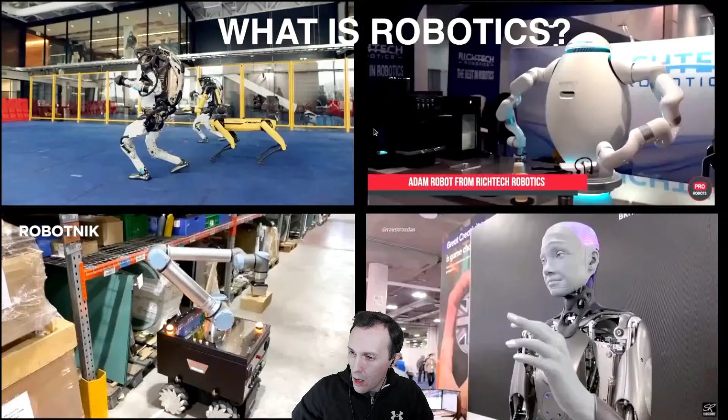Okay, so what is robotics? Well, in short, that's a study of robots, which covers different phases like design, construction, operation, and other stuff, pretty similar to what we get used to in common software development, but this also covers the hardware part as well.

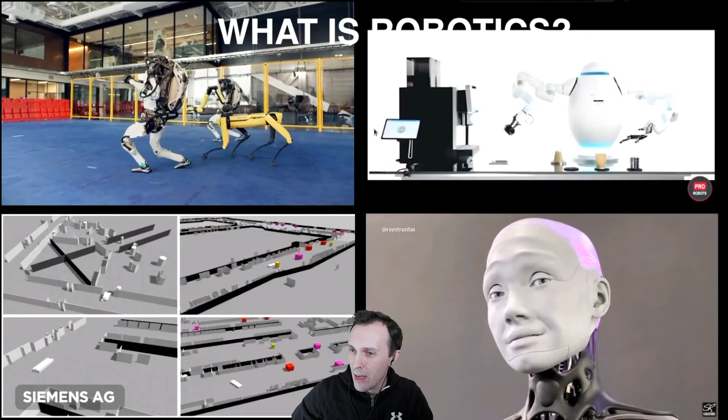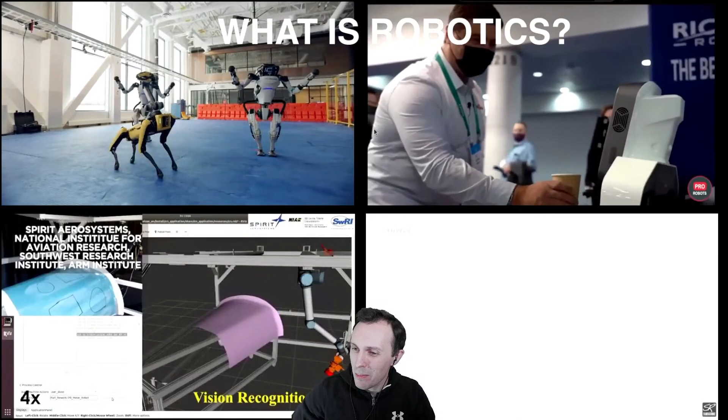On this video, you can see the current state of robotics. Of course, that's not everything that's happening in the robotics world at the moment, but you can easily find more videos on YouTube, and I promise you'll be excited from what you'll see.

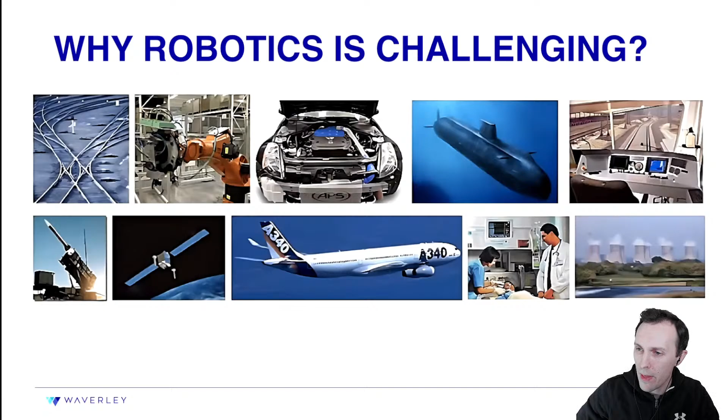So the robotics field is quite challenging, and there is a number of reasons for that. First of all, it could easily be put on the same line with such domains as healthcare, aerospace, automotive, etc. But by definition, a robot assumes significant interaction with the physical world, which also means interaction with humans. Technically, robots can be used in each of these areas.

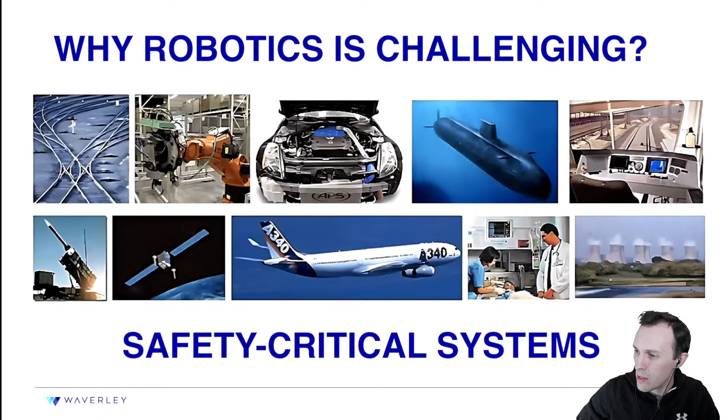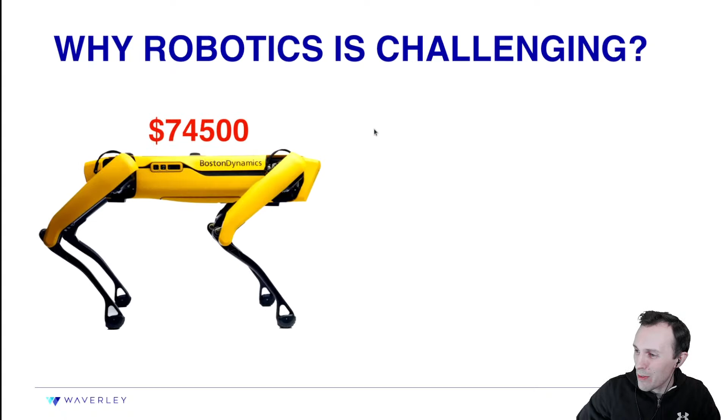So the other reason I would like to highlight here is the price of the robot. That's a commercial grade robot from Boston Dynamics, you probably heard about it before, called Spot. Here is the price of the base version of this robot. Just to give you a comparison, here is the Porsche Cayenne price.

As I mentioned, that's a base version, and if you want to make it more suitable for your business needs, you would need to add additional sensors like lidars, cameras, manipulators, and well, you may quickly end up with the price of a Ferrari in this case.

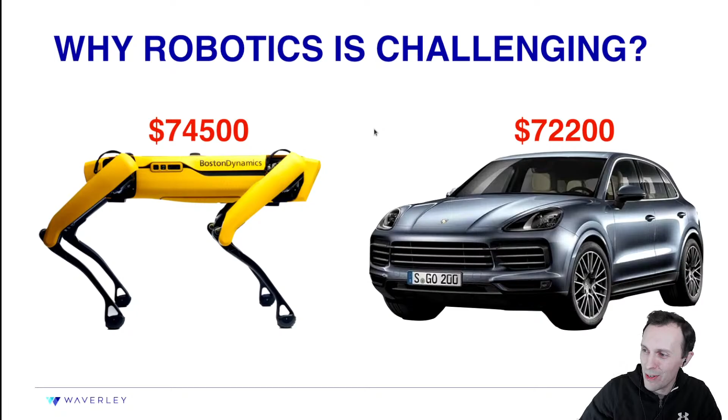So you may just wonder, what do we get for this price? I would probably expect a perfect machine that can do everything we want, but in fact, it's imperfect. And we, as an engineering team, are responsible to make it safe for the surrounding environment and humans. All right, and that's why testing is crucial.

And if you talk to any robotics consultant and ask if it makes sense to start testing on the real hardware, they would say no way. Because obviously the cost of the defect is huge, engineers in robotics start with simulation. They build a simulated environment which is close to the real environment that the robot would operate in, and only after that they can move to real hardware tests.

I will cover this part a little bit later today, and now I'm going to switch to some common terminology, just to be on the same page, and it will help you to understand me better within this session. But you would also hear a lot of these terms in different robotic communities.

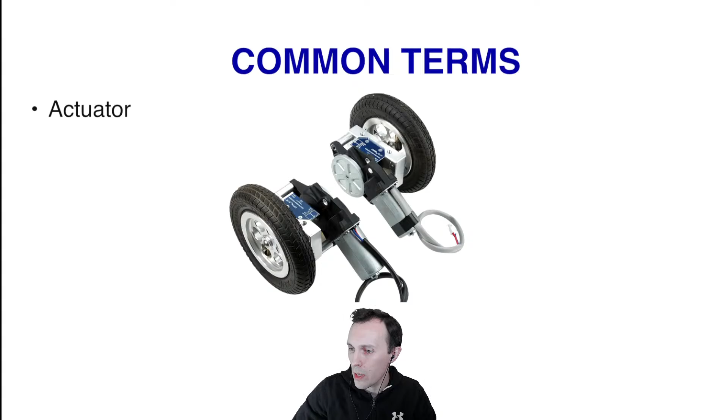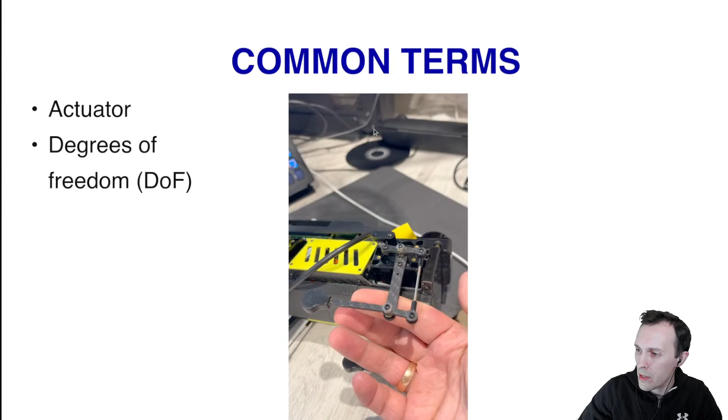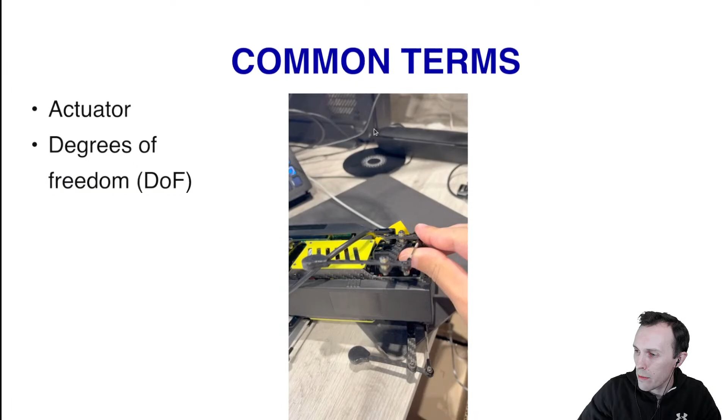Degrees of freedom, that's the level of flexibility and versatility of the robot. In this particular example, we can see a legged robot, so we can move its leg in different directions, and it is controlled by 3 servo motors.

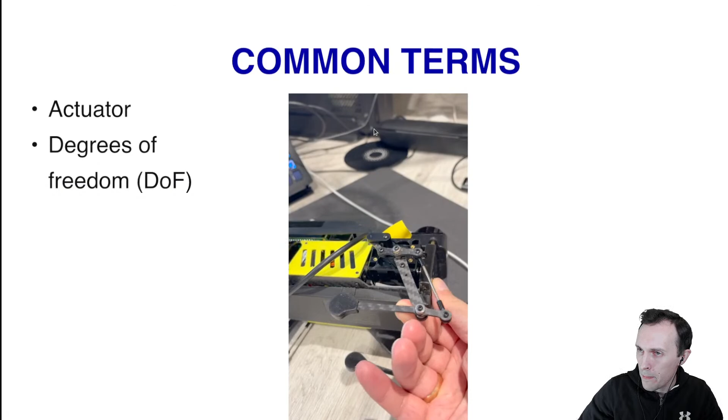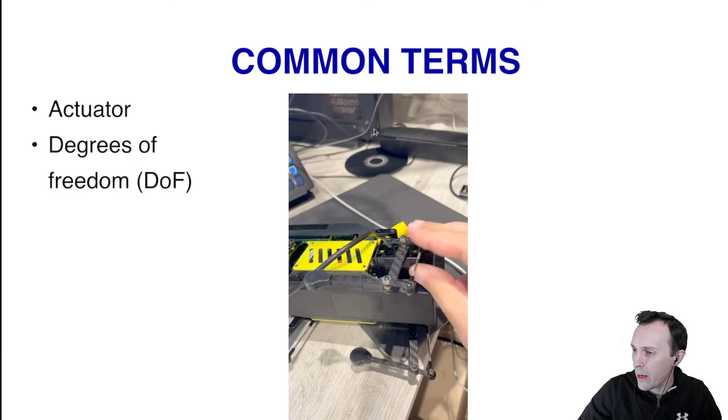So usually in the robotics community, it's common to treat the joints or actuators as a single degree of freedom. So given each leg has 3 degrees of freedom, the whole robot in total has 12 degrees of freedom.

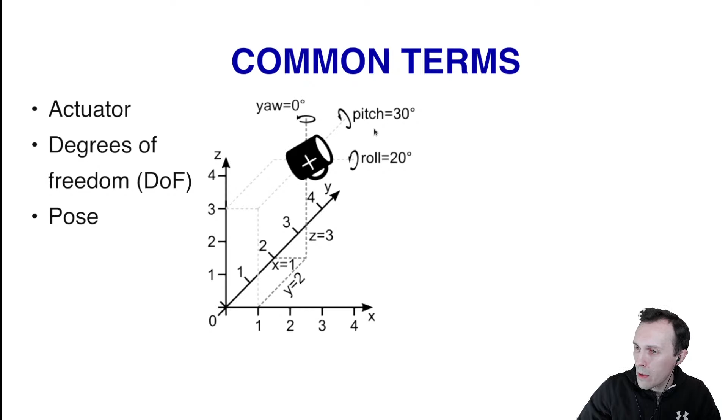The pose of the robot is the combination of position and orientation. That's a basic example of a cup in 3D space, just to give you a reference. We may have some point that represents its position, and probably the terms like yaw, pitch, and roll would be new to you, but basically they reflect the rotation angle along the corresponding axis. The easiest way to remember and make a visual association with these terms is to follow the right-hand rule.

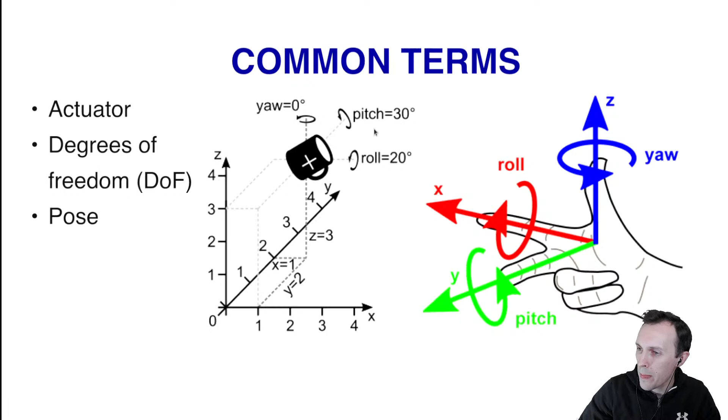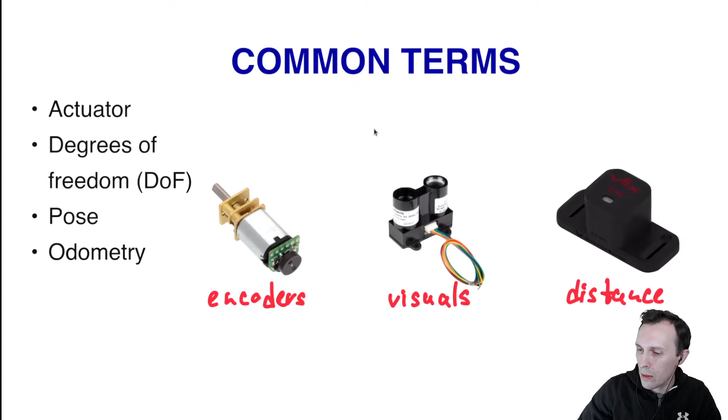Odometry, that's a very important process. It's a method of robot pose estimation. I will cover this part later within this session, but for now I would like to highlight that there are a number of ways you can get this data, like wheel encoders, visual distance sensors, and other stuff.

Velocity, that's something you should be aware of from your school or university classes. I would just highlight the difference here. The same way we decompose the pose into position and orientation, the linear velocity reflects the position change rate, and the angular velocity is about orientation.

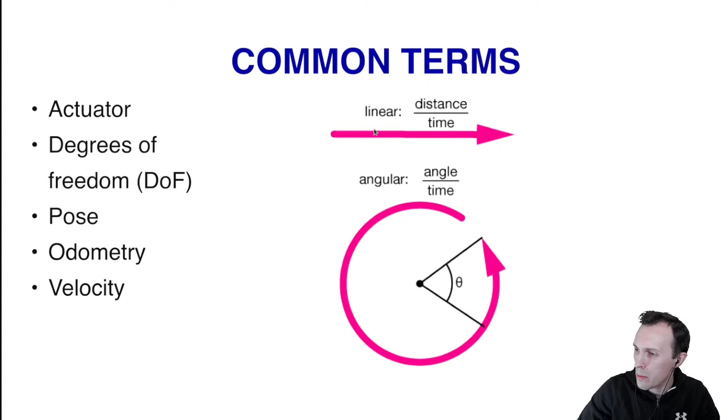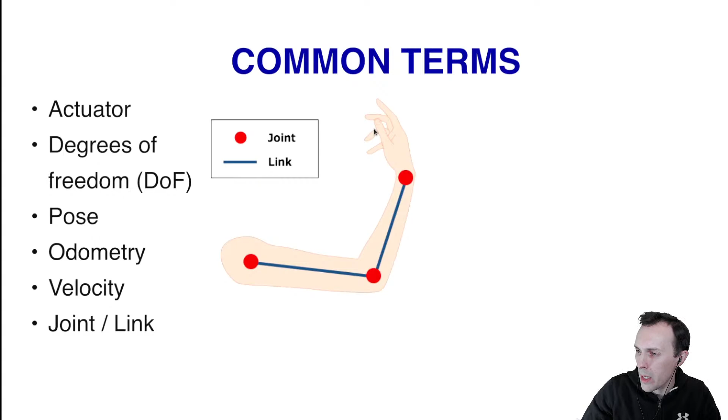Joints and links, that's something you would hear a lot while modeling, on the modeling phase. To give a visual association, we can refer to the human arm here. Basically each part of the arm might be treated as a link, and the connections between these links are treated as joints - that might be wrist, elbow, shoulder, for example. And to compare it with an industrial manipulator in this case, you can also see that there are a lot of links and joints as well.

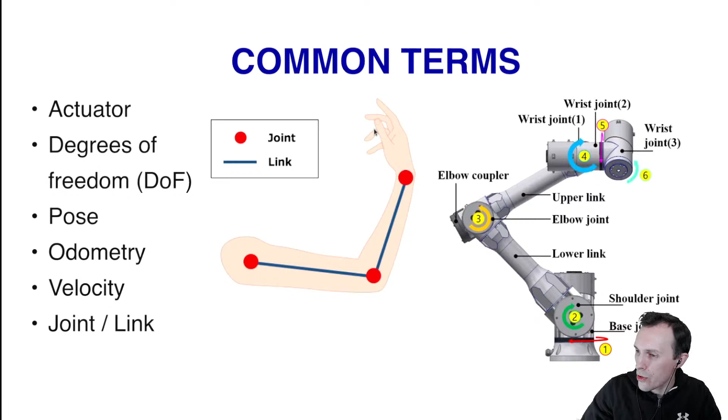Kinematics, that's one of the most important and probably trickiest subfields in robotics. Technically it's an engineering branch of mechanics, which in turn is a subfield of physics, but in short, it's a study of motion.

Let's consider the following example. You want to move your robot, or ask it to move, to the opposite side of the room. In this case, we can decompose this task into the robot's position change over time. So you need to move the robot from point A to point B. We operate the robot's position in 3D space, or task space. But the robot itself knows nothing about the pose or 3D coordinates, so it doesn't care about it.

So we need to tell the robot how it should move to the opposite side of the room. The only thing the robot understands in this case is how to, for instance, rotate the joints or servo motors - at what rate, what angle should be set for each joint. So that's about the joint space.

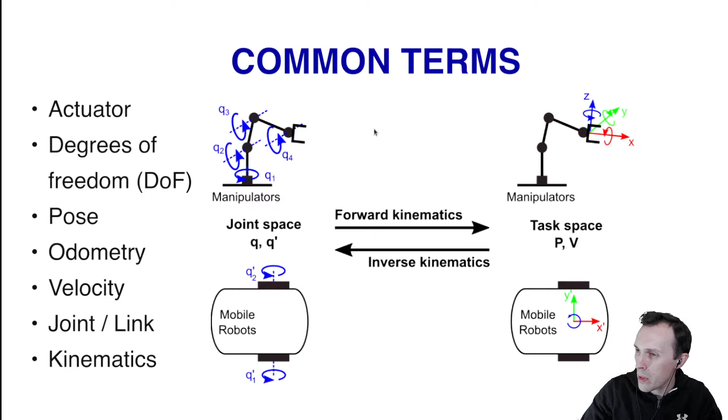Okay, so before we move on to more technical stuff, I would like to touch on another important topic, which is a brief overview of autonomous systems. The first thing I want to cover here is the variety of autonomy levels. I don't want to cover them all - I'll just focus on the boundaries to give you a reference.

The zero degree of autonomy is also known as the teleoperation process. That assumes we control our robot with a human in the loop, and we can technically use any known interface for that - for example, keyboard, mouse, gamepad, or even haptics. That's an example, probably the most advanced example, of how we can control robotic arms with special gloves which mimic human movements. That's pretty useful in case we want to operate in a potentially dangerous environment for humans.

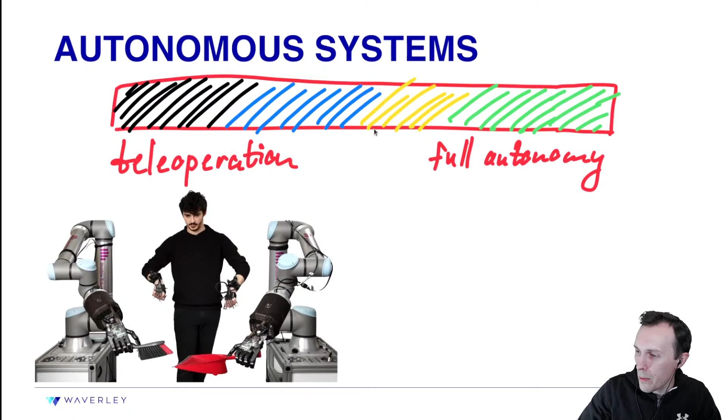To give you an example of full autonomy, the most popular one you may find would be a warehouse robot. But you may also have heard about autonomous vehicles, like self-driving cars that appeared on the market several years ago. That's also a good example of a fully autonomous system.

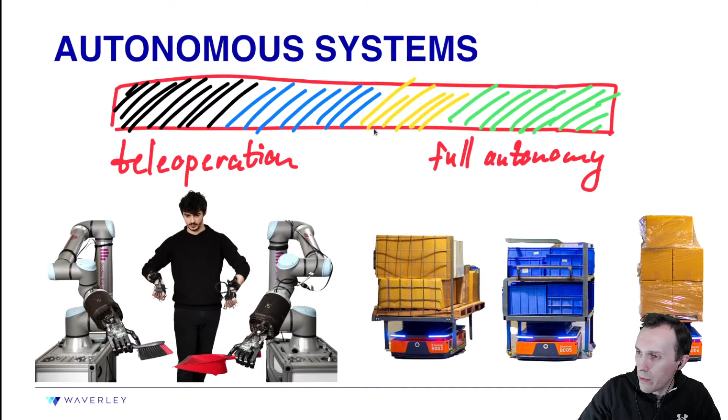In terms of capabilities, I already mentioned that robots assume significant interaction with the physical world. That's how they collect knowledge from the surrounding environment, the way we humans do using our senses, like eyes, arms, ears, and other parts.

That's the sensing phase, and the robot uses different sensors like lidars, cameras, and inertial measurement units to collect this information. And we do that for some reason, of course, and that's how we come to the perception phase.

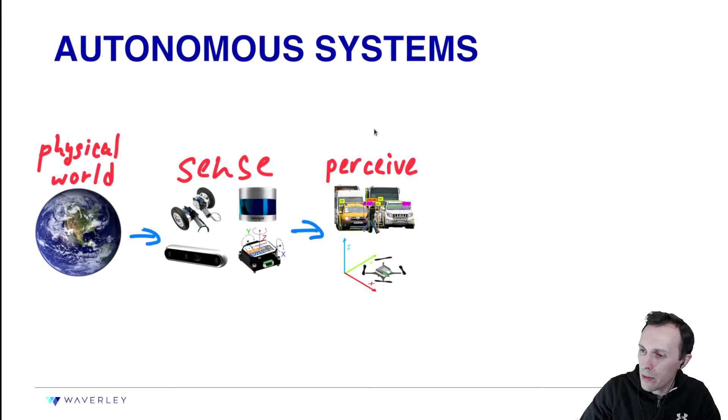That's where we know how to interpret this information. Given, for example, some visual sensors like a camera, we can do object tracking, or be able to localize the robot in the environment. We need to be able to estimate the pose of the robot. So that's just a couple of examples. Of course, it depends on the hardware that is mounted on the robot.

When we know how to interpret this information, we can do planning, and that's where the business goals come into play. The basic example might be patrolling, when you need your robot to move through different waypoints around the territory and take some information.

And the acting phase, that's basically where we ensure that we follow our plan, and that's where we also close the loop with the physical world. As soon as we send some commands to the robot, it changes the state of the environment.

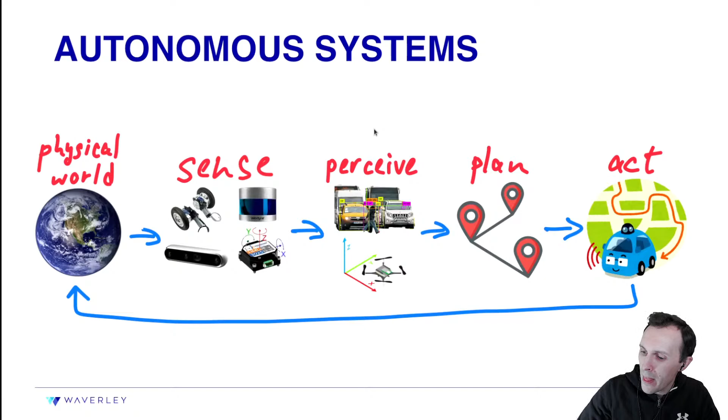Okay, let's move on to more technical stuff. If you ever wondered if there is anything existing which allows control of robots, there is, and that's the de facto standard called ROS, or Robot Operating System. Just to clarify, that's not technically an operating system like the ones we're used to, Linux, Windows, or Mac. It's more like a framework and a set of tools that allows us to effectively control robots.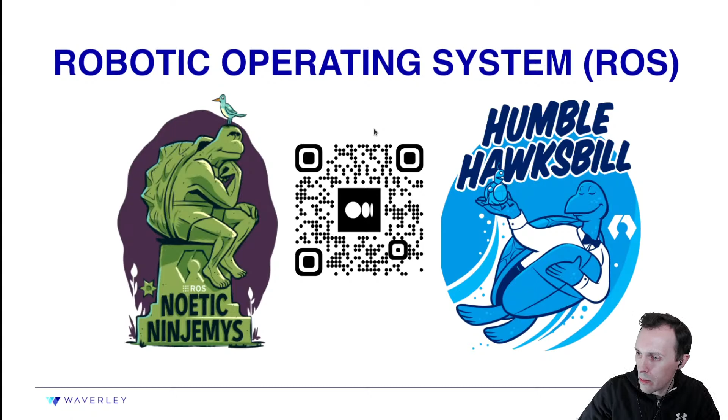Basically, ROS2 addresses all the issues present in the first version, but you can read more about the differences between these two by scanning this QR code.

Okay, so let's take a look at the common concepts. I mentioned ROS2, but technically they are all valid for the first version as well. So what is a Node? Well, a Node is like a common process, just some sort of a wrapper, and you can put everything you want there. An example of a node might be a driver for some sensor, or the planning and control nodes to do autonomous navigation.

So everything else is pretty much about the way these nodes communicate with each other. Technically, ROS is some sort of communication-driven framework. The topic-based communication, if you've ever worked in the IoT field, you may have heard of MQTT protocols. It's quite similar, but there are some differences. MQTT uses a broker to route requests between publishers and subscribers, while ROS uses a bit different style that I'll cover in a couple of minutes.

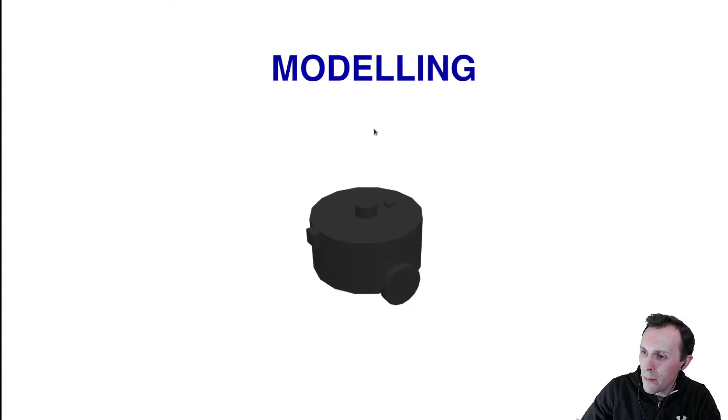Modeling is a very important process. I've already mentioned at the very beginning that there are a number of reasons why we need to test our software in a simulation first. That process covers the modeling of your robot. The process itself is quite straightforward. There are a number of formats you can use. One of the most popular is the URDF format.

It's an XML-based format. There is also Xacro, which is more like a template engine that allows you to create reusable blocks, define variables, macros, and other stuff. That makes your code more readable and maintainable. But at the end, this template engine would still generate your URDF, which is fed to the robot state publisher, a specialized node that interprets this model and sends it to all the potential subscribers. An example of such subscribers could be visualization or simulation tools that need that information.

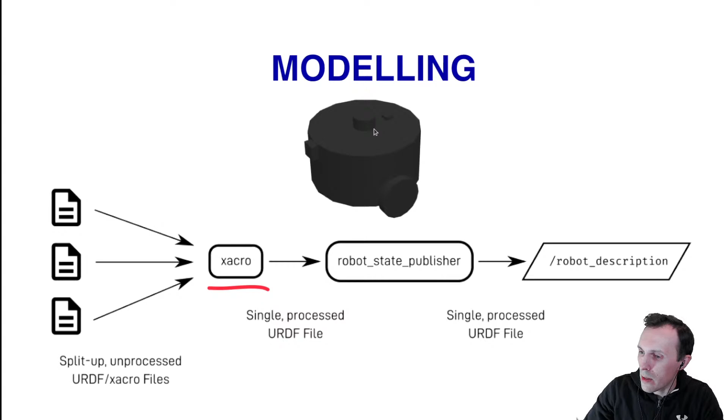So let's take a look at the example of a wheel. Here we have links and joints that I've already covered in the common terms section. A wheel is our link, and the joint, well basically it could be treated as a servo motor, but the only thing I want to highlight here is the type of the joint.

If we consider some rotary joint, that's like a servo motor, that's a continuous type in terms of ROS specific modeling. But you can also have static joints. For example, if you want to connect some sensor like LiDAR or IMU to your robot body, they are not moving, so that would be a fixed type of joint.

The link consists of different parts. The visual part defines the geometry of different parts of your robot. It might be some common shapes like cylinders, boxes, and other stuff. But you can also use a 3D model here if you have experienced 3D modeling engineers in your team.

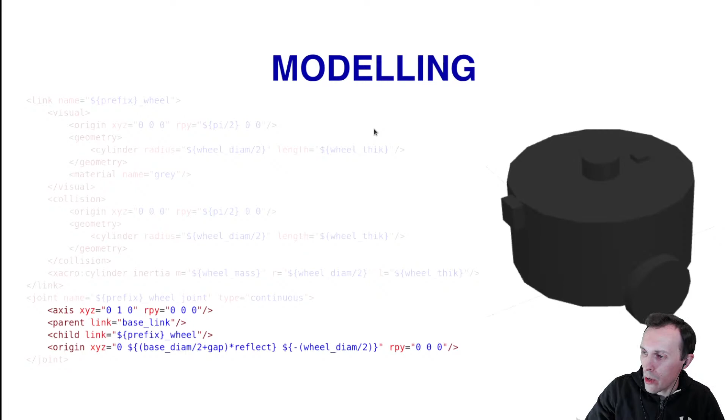So the joints, that's pretty straightforward, as in the joints section we define the relationship between different links. In our case, we have a robot base or body, and we connect it with a wheel. We can also specify a relative position and orientation of this part.

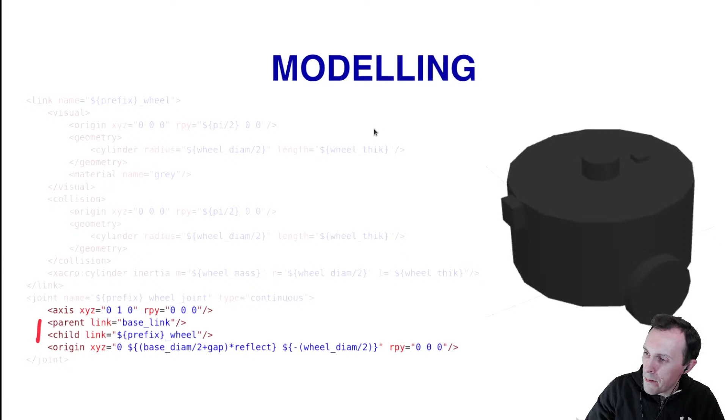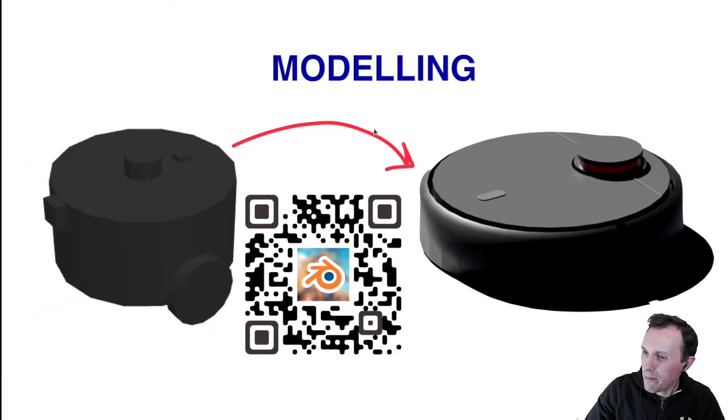So I've also mentioned that you can use a 3D model instead of common simple shapes. That is achievable using specialized 3D modeling tools like Blender. That's not quite the same robot, of course, but just to give you a reference of what you can create in this tool, if you need that.

When you are done with the robot modeling part, you can switch to environment modeling. Ideally that should be pretty close to the real environment that your robot would operate in. That's just an example of the room of one of the apartments that I've rented before. I spent about one and a half weeks, with zero knowledge in 3D modeling, to build that.

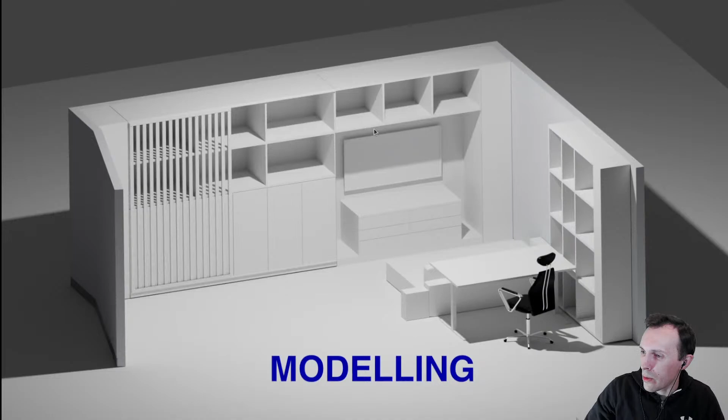So technically, yeah, you can do the same. I would recommend the Polygon Runway courses, Blender courses. They have a free course which would basically be enough to build something similar.

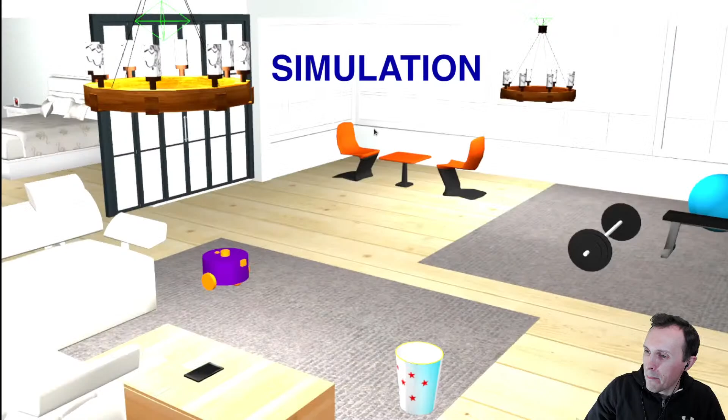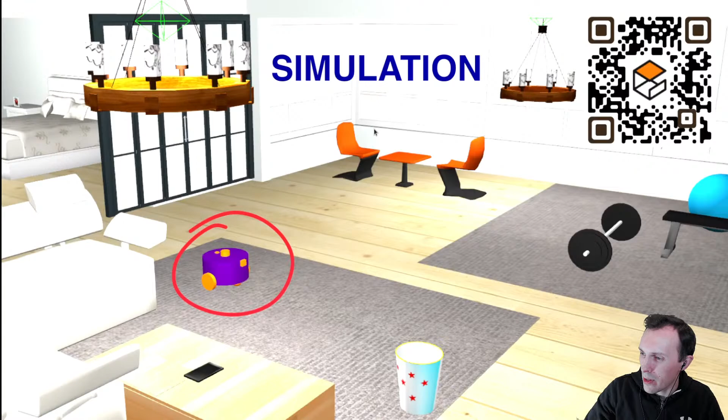When you have both models, you can deploy them into a simulation engine or physics engine. One of the most popular ones is Gazebo. Here we can see our robot that I already described before. The world is a bit different. I've just reused an existing small house world, an open source world provided by Amazon. You can find it on GitHub.

It would be pretty useful if you either don't have a real robot yet, or want to practice some algorithms with your particular robot. Feel free to get more info about the Gazebo engine by scanning this QR code. It is officially supported by the ROS committee and community. Sometimes people use different types of physics engines like Unity, but it's up to you what you choose. If you don't have any experience in robotics, I would recommend sticking with Gazebo.

Okay, so that's an exciting moment because now I want to show you a demo of the internal product that we are currently building at Waverley, Ukraine. At this point, I want to also involve more people from different locations, so feel free to contact me either in Slack, or at the end you will see a feedback form where you can leave your intention to assist with this project.

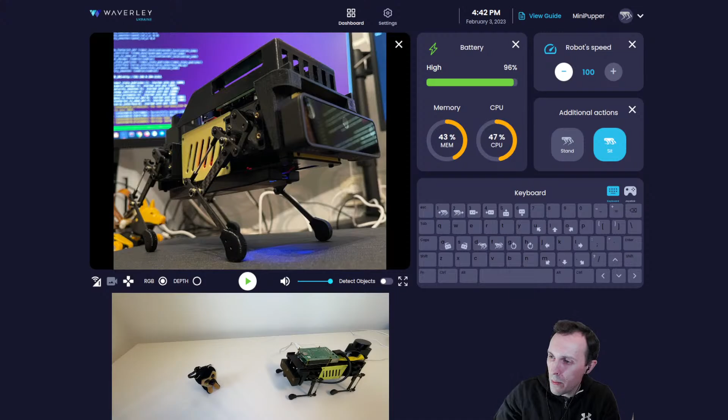Okay, so let me switch to a different window. Here is the real app. The main screen is pretty much like a video player you'd get used to in other streaming apps. At the moment it can stream video from the robot's camera. Below you can see the stream from my phone. Technically it's not a part of our app yet, but I wanted to give you a reference from a different perspective so you can see the robot. And the dog, well, we will use it for our experiments as well.

Yeah, so basically at this point, this app allows us to do teleoperation or remote control of our robot.

We have different widgets here, like hardware sources. Battery is currently simulated, it's not yet implemented on the backend side, but memory and CPU are taken from the Raspberry Pi, used as a brain of our robot.

Robot speed is something very hardware specific. This particular robot's servo motors work at the top speed, so we cannot increase them, and technically physically we cannot reduce them either, but we can use some software tricks to make the motion slower.

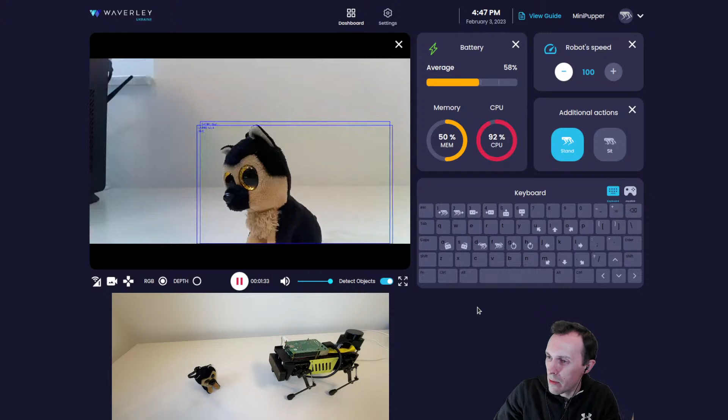Yeah, and let me switch to the depth mode. So we can't see anything yet. I will just turn the robot to my direction. You can see me sitting. Let me just move its head up. I can move my head closer, turn it here like this.

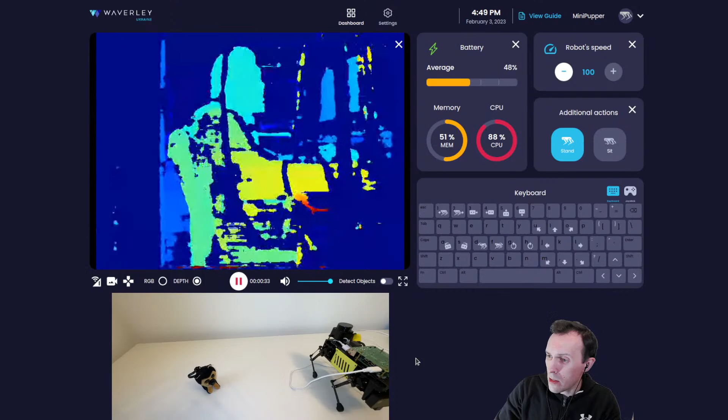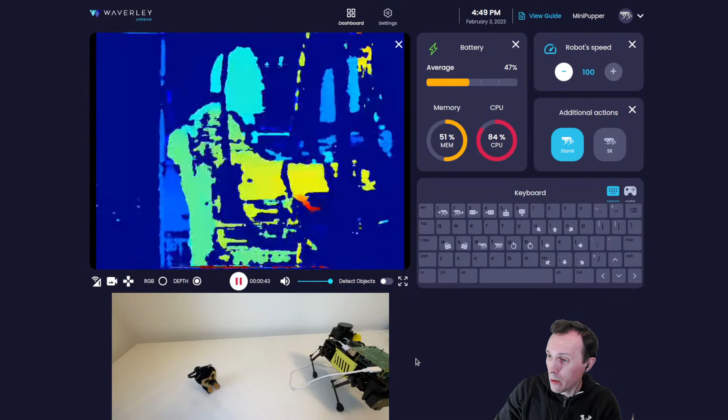So that's a depth mode of the camera, which can also be used in the other tasks that we will cover later today, like obstacles detection. Okay, so that's how the teleoperation work. At the moment, that's pretty much we support in this app.

But we have a roadmap, and well, technically we want to add some more advanced stuff to be able to do autonomous navigation and robots fleet control and the other advanced stuff.

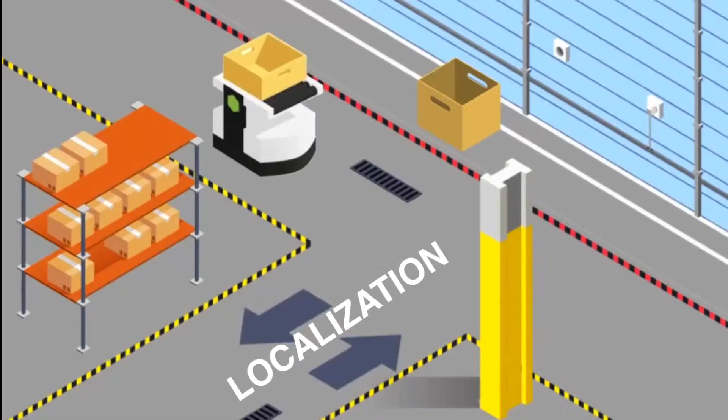Okay, let's move on. So the other important task that is used in robotics is localization. So that's basically an ability of the robot to know where it is in the environment. And this is a tricky one because it covers a lot of underlying algorithms involved.

Basically, one of the most popular ones is the sensor fusion algorithm, which allows us to merge data from different sensors to produce a more accurate pose estimate. Well, you may just wonder, why do we need that? Why do we need to merge data from different sensors? Well, the reason for that is that our sensors usually lie. They are not so accurate as we might expect. They may produce noise, they might drift, they might be affected by occlusions.

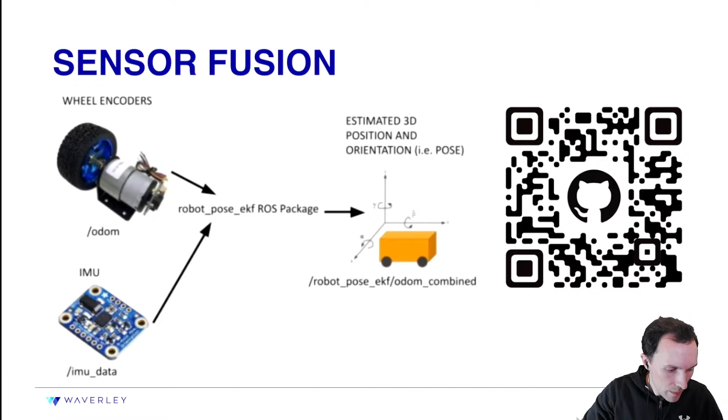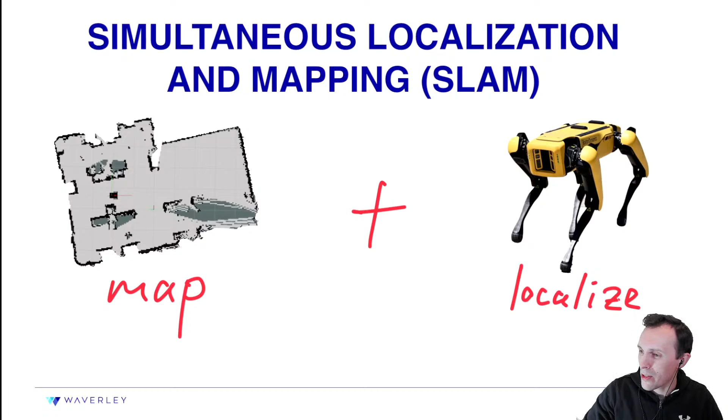Let's move on. The robot localization process is usually not done in isolation, so you usually use it together with mapping. And that's actually one of the trickiest problems in robotics, called SLAM, or simultaneous localization and mapping. From its definition it seems quite simple and straightforward at first glance, as you need to be able to localize a robot and build a map. But in fact, this problem is also associated with a chicken and egg problem, because to build a map you have to know where the robot is, and to be able to localize a robot in the environment, you need a map.

Technically, to construct a map, you are taking different readings from different sensors like lidars, cameras, and so on. But the robot needs to know where it is in the world to be able to put this sensor data on the map, and to know where it is, we need a map to align the current readings from the sensors with the previous data we received. So that's why we reach a circular dependency here, and that's also referred to as the chicken and egg paradox.

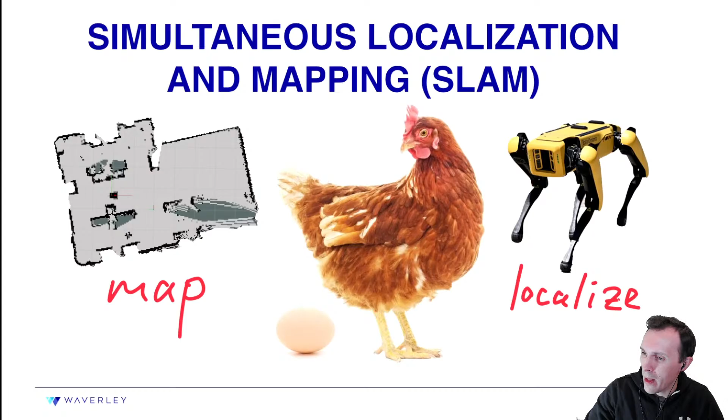Just to give you a simple example of 2D SLAM: if you've ever worked with a robot vacuum cleaner, you may have already seen companion apps like the one displayed to the left. The first time you run your vacuum cleaner robot, it examines your apartment or house and builds a map of your rooms — that's a similar process here.

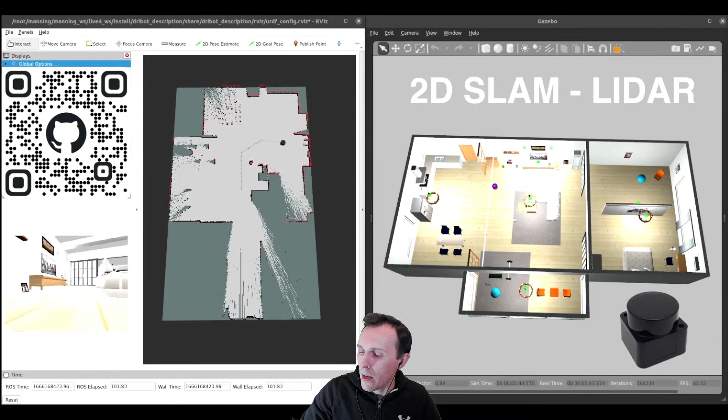To the right you can see a 3D simulation of a small house using Gazebo, where we technically use a lidar to build such a map. You can even buy an inexpensive lidar version which supports 360 degree scans, but more advanced commercial grade robots may use more expensive lidars which support 3D mapping.

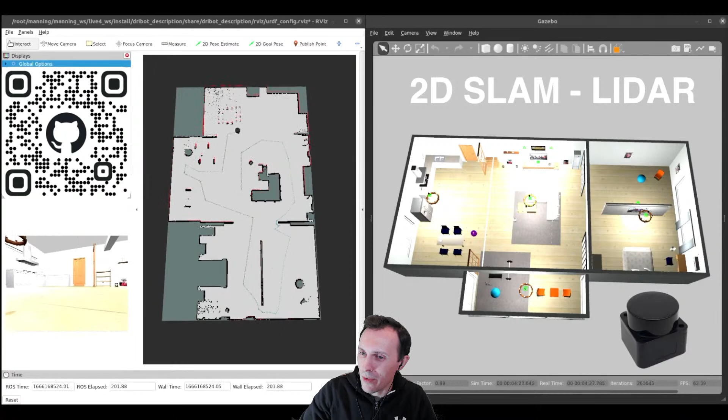Okay, so let's move on to the autonomous navigation process. Technically, it's the ability of a robot to move from one point to another without human intervention. So that's a very complicated process which involves all the data that we already learned from our previous slides.

Just to summarize what information we need here: first of all, it's the ability of a robot to estimate its position, and that's where we get this information from our SLAM algorithms. On the other hand, our robot should be aware of obstacles to be able to navigate autonomously.

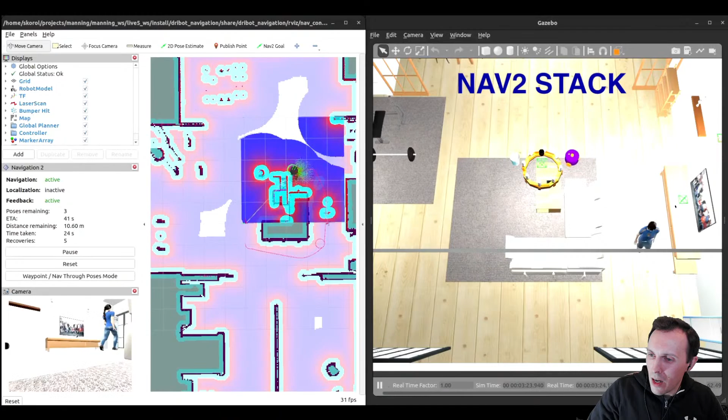Okay, so that's pretty much I wanted to cover related to common tasks, and I want to give you a quick start checklist.

As you may have already guessed, it's not really quick, but anyway, it should help you get familiar with this domain.

If you haven't worked with this before, I would probably recommend you to look at related areas like IoT. You can buy relatively inexpensive microcontrollers.

Like ESP32, Arduino, even Raspberry Pi. Connect some sensors, and it will give you some basic understanding of how all that stuff works.

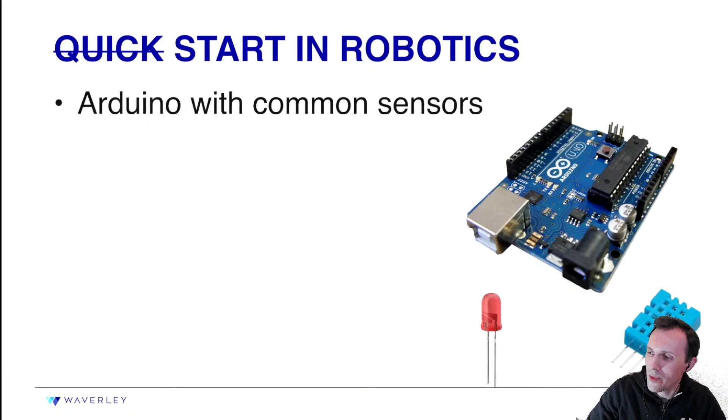To look at the data flows, you can even control servo motors there. So yeah, that's just the basic stuff.

Then you can switch to more robotics-oriented stuff, and I prepared a list of some very basic, inexpensive robots that you can either build on your own if you have a 3D printer, or buy.

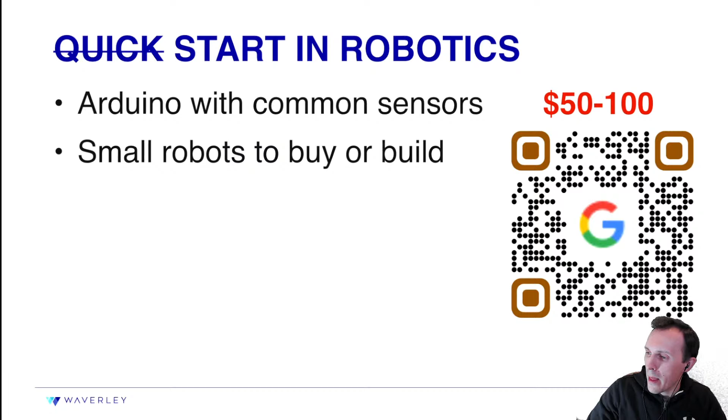To be able to build more advanced stuff, well, the starting price would be like from $300, and the robot you see on the demo, it's a Mini Pupper.

By the way, there is a second version of it available on Kickstarter, so you can order that robot.

Well, that's where you can play with ROS, with sensors that are pretty common for commercial grade robots, like LiDAR and cameras.

The main difference would be probably in the type of robot. If you wish to play with a wheeled, legged, or even aerial robot, the brain could be...

The most popular versions are the Raspberry Pi and Jetson boards, products supplied by NVIDIA that use Jetson boards.

The main advantage in this case would be the GPU capabilities, so in case you want to do some AI related stuff, it would be the best option for you.

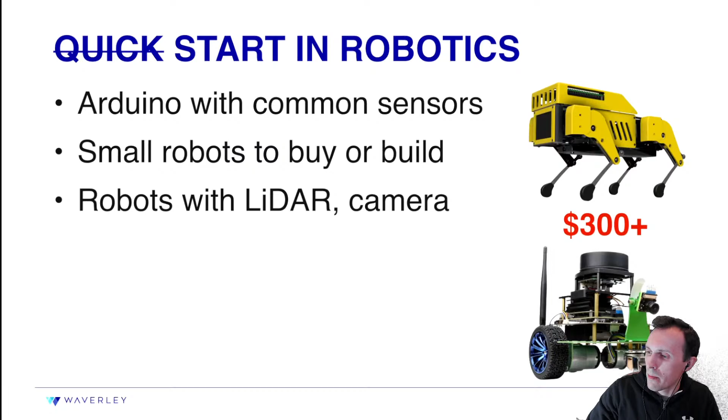So yeah, at some point you would definitely need to drill into some Linux basics and some programming languages. ROS, well, it officially supports C++ and Python.

Python obviously is easier to learn. Well, technically the second version was completely rewritten, I mean ROS 2 in Rust, and it allows you to write new clients in different languages. But anyway, Python and C++ have better support at the moment.

And in terms of ROS basics, you can even follow the official documentation here.

I would also recommend you read a book, which is currently in early access.

Robotics for Programmers, and it will give you different basics about the underlying math and physics.

And the last one, well, if you want to get more practical experience, you can try live projects.

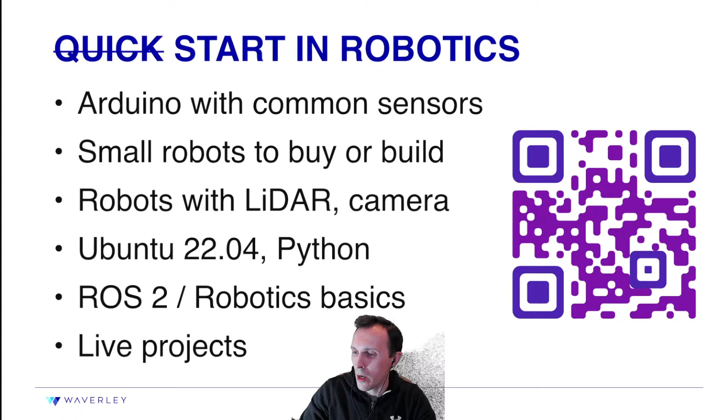Okay, so that's pretty much it I wanted to cover within this session.